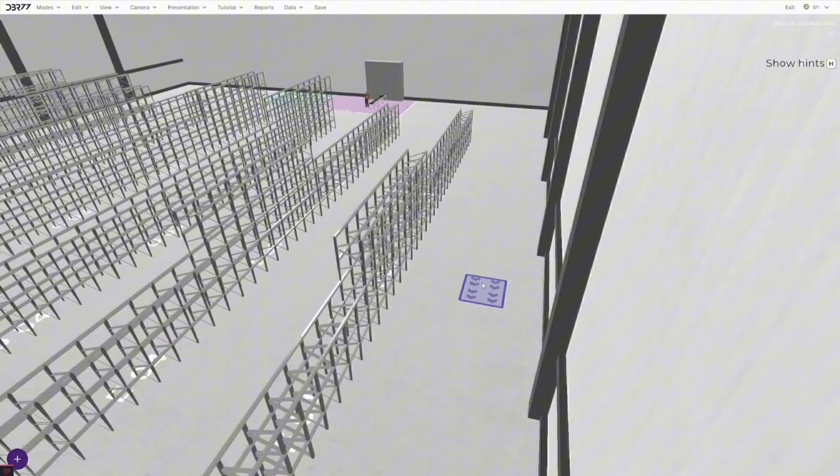With some very brief and short introduction to our meeting, the assumption is that more or less in the hour we would like to share with you very practical insights about digital twin, not only theory of what digital twin can do, but mainly what was done by our team with our clients. We would like to share with you what's the difference between the tools which are on the market and our solution, and why we believe our solution is perfectly fit for the current market expectations.

And we would like to inspire you also with the most famous digital twin which exists on the market, which is of course delivered by NVIDIA. So I do hope we can find such movie, and if not, we will go and probably we'll be back to that movie.

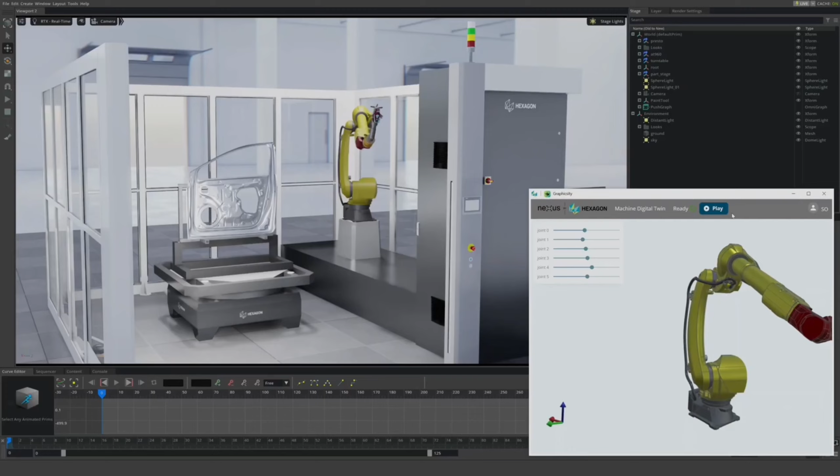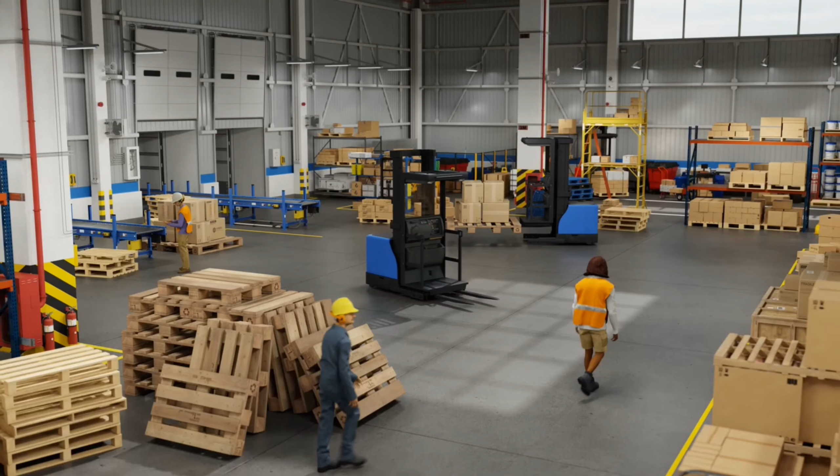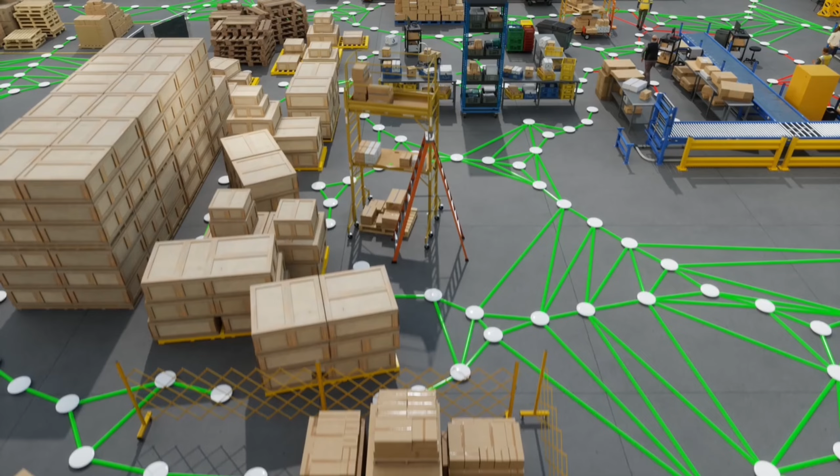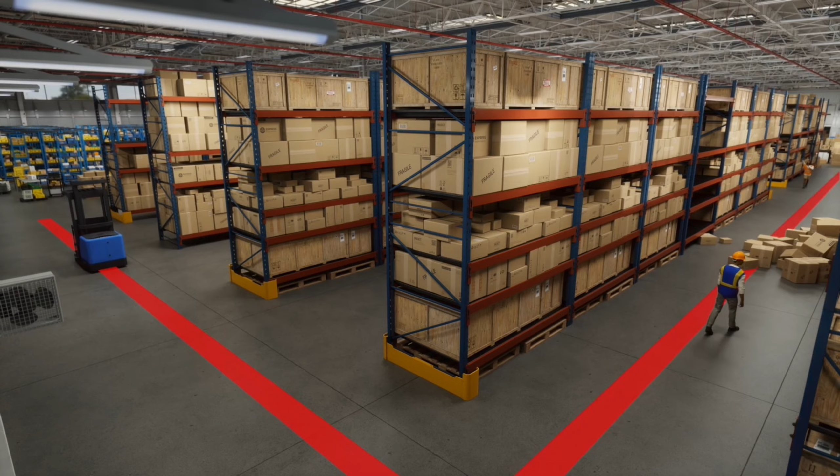Digital twin. The AI agents helping robots, workers, and infrastructure navigate unpredictable events in complex industrial spaces will be built and evaluated first in sophisticated digital twins. This Omniverse digital twin of a 100,000 square foot warehouse operates as a simulation environment that integrates digital workers, AMRs running the NVIDIA Isaac Perceptor stack, centralized activity maps of the entire warehouse from 100 simulated ceiling mount cameras using NVIDIA Metropolis, and AMR route planning with NVIDIA cuOpt. Software in loop testing of AI agents in this physically accurate simulated environment enables us to evaluate and refine how the system adapts to real-world unpredictability. Here, an incident occurs along this AMR's planned route, blocking its path as it moves to pick up a pallet. NVIDIA Metropolis updates and sends a real-time occupancy map to cuOpt, where a new optimal route is calculated. The AMR is enabled to see around corners and improve its mission efficiency. With generative AI-powered Metropolis Vision Foundation models, operators can even ask questions using natural language; the visual model understands nuanced activity and can offer immediate insights to improve operations. All of the sensor data is created in simulation and passed to the real-time AI, running as NVIDIA Inference Microservices, or NIMs. And when the AI is ready to be deployed in the physical twin, the real warehouse, we connect Metropolis and Isaac NIMs to real sensors with the ability for continuous improvement of both the digital twin and the AI models.

Okay, this was NVIDIA's solution. It will be great if we can switch to my screen now and present what DBR77 delivered to the client.

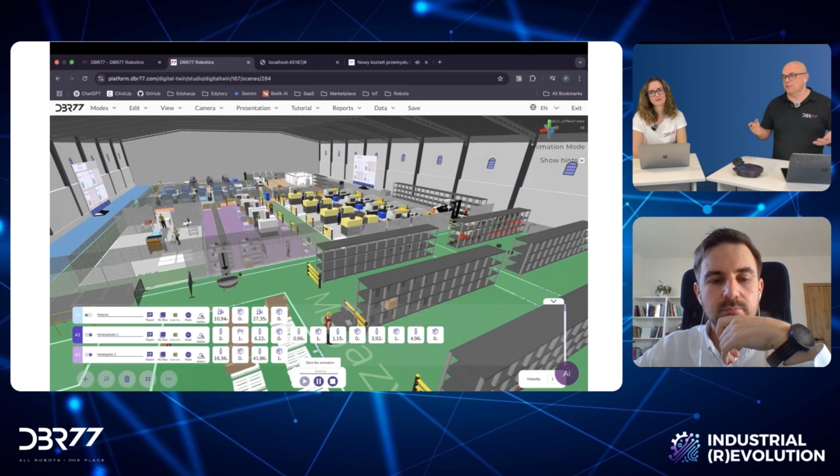So what's the difference between simulation of a production line and the whole factory? This is a great question, because you saw in that short movie that NVIDIA, as well as DBR77, approach the whole factory. In the previous generation of programs, what our competitors did - and still do - is simulate the line. That means we can simulate the process, how material flows, see what the times are for every single station, and whether the line is balanced. But in the previous world, we were not able to look at the whole system, meaning the company, the production plant, the logistics center - the whole system. It means we didn't take into account any kind of analysis about material. So this is a huge shift - in the previous perspective, we only looked at the process, how material flows.

And now we try to look at the real stuff, like, we have some material on gate and how the material flows through the organization. You know what is the biggest difference? In that way we can look at the whole organization as one system, because all of the processes, all of the line, all of the operations and stations are connected through the material flow. So this is a really huge difference.

Can I ask for my screen, for my computer? It will help probably a lot to discuss what we do. Or maybe I need to share something. This is a time for another question, because I have to deal with my stuff.

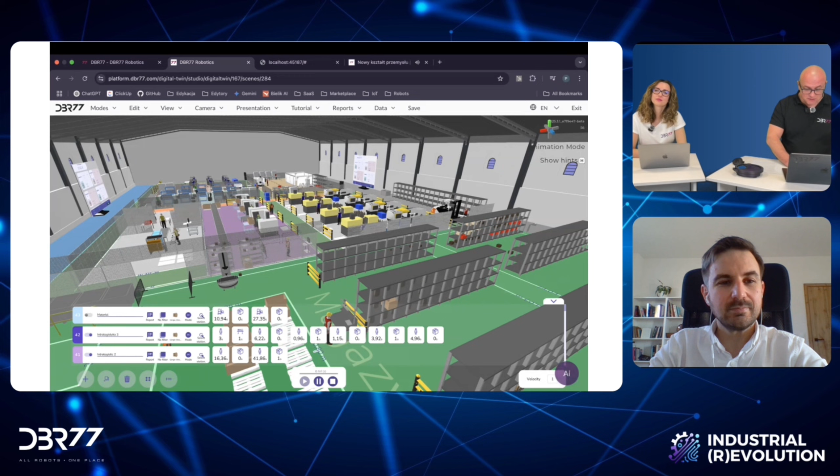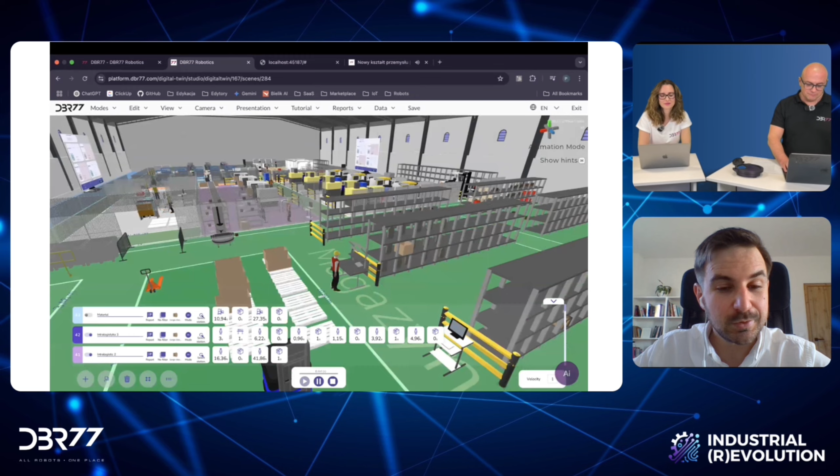Yeah, let me explain. I think we've seen that you were moving on within our digital twin, so it was okay. Now you're switching to the IoT panel, so it seems like it's working. So if you're ready, just take a hit and follow on, so that we can discuss it.

Basically, the animation is simply a representation of a limited task, defined in a specific manner upfront. Simulation gives you the opportunity to tune the parameters or create alternative scenarios for that kind of animation, which gives you additional added value in terms of insights you generate during this simulation.

Yeah, that's truly a huge difference. Because when we speak about animation, like others deliver on the market at that moment, it's a very simple process. For example, one cycle time on the flow, and we can look at like 5 hours, the machine is working the same way, and the results are quite predictable. But in the complex world we exist in right now, the batches of production are very short and there are a lot of interruptions between all elements in the process, so we have to find a way to simulate.

So we can change assumptions first of all. Second, there are a number of diversions in the production, and the final results can be different. So it's so important that we can automatically change assumptions, and then simulation will give different results. And you can guess the different results mean also a lot of data. So that's the huge difference between tools which exist on the market and our solution.

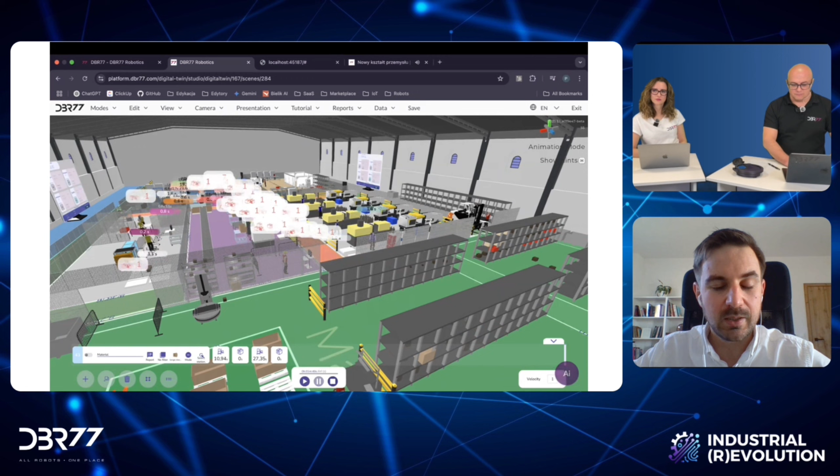Or maybe, simply speaking, just to add up, because I think it might be too difficult for our guests - animation is somehow unrealistic, because in the real world we do not press play and go home while the machine works 24 hours a day. In real life, what happens is we set up a machine for one product, and then after a number of cycles we need to change something, or there's another event triggering additional actions to be taken, and that can be simulated. That is not animation. Then we are closer to real world examples with a simulation.

Yeah, that's the point. Okay, I see now. So give me a few words and some tips on how to build a digital twin.

Yeah, this is the question that Bartek started answering 10 minutes ago. First of all, we need 3D models, so we understand how the process is organized, how the plant is organized, what kind of machines we have there, what kind of equipment, how many people.

So we need 3D models which will represent all of that stuff on our plant. This is the first point, honestly much easier than the second one, because the second one is data. We need to understand first of all what is the typical cycle time for any object in our digital twin - I mean standard time. Many companies know standard time, but very often this itself is the problem. Second, we have to understand what was the deviation from the standard time to the real stuff in the past.

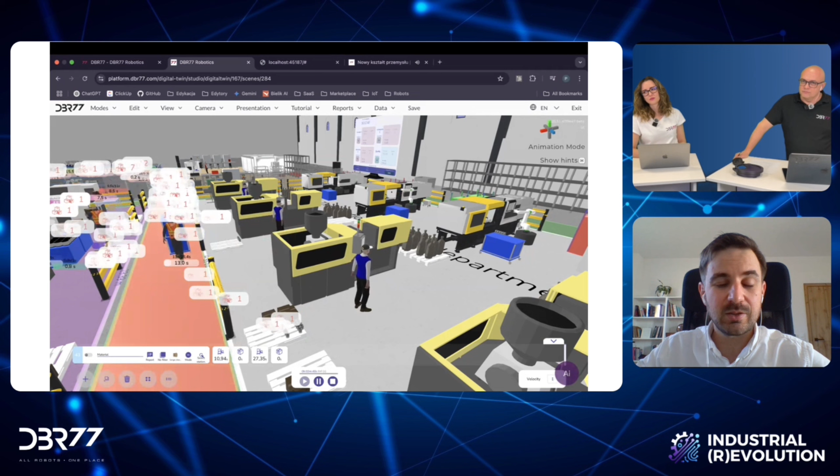No, I would say there are a lot of possible technologies, but they're probably too expensive to have any practical impact these days. We can imagine placing a lot of sensors to track even a single screw, but we need to consider the cost of implementation, and our guiding principle is to keep it simple and affordable, even for SMEs. That's why we need to use software to boost that and improve the lack of speed presented in hardware development, because software develops far faster than hardware these days.

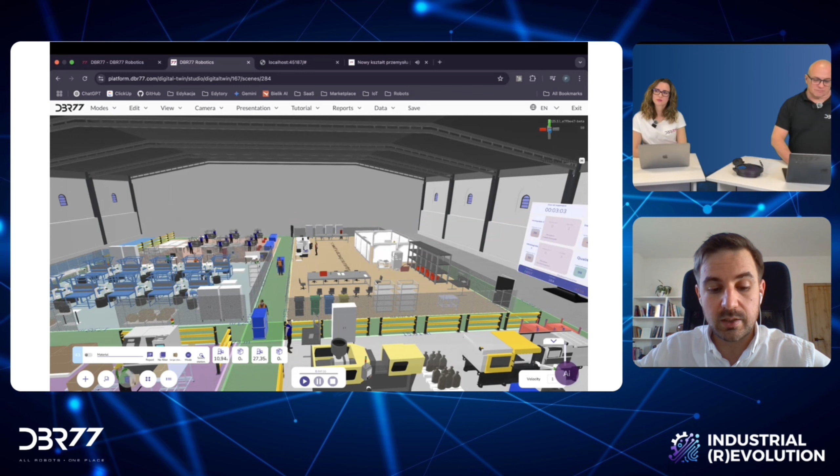Do you have an estimation of which technology will give us the final result about locations? I've got no strong feelings, but for me it should be something between RFID and RTLS. RFID is widely adopted, and RTLS or ultra-wideband solutions provide better accuracy. But the limitation is you need a lot of antennas and additional points to measure distances and create additional network layers covered within the factory, so it gets expensive, and it's probably only used when required, because it's hazardous or required by law.

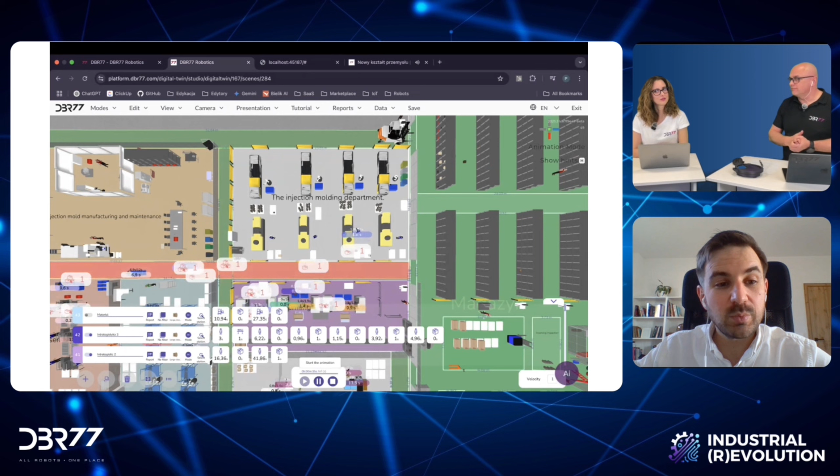I have a bit of a different opinion. I believe sooner or later it will be a camera on the roof, and from that perspective you can look at the plant, as I'll present on my computer. Team, switch to the computer - it will be fun, don't switch it back. Then you can recognize what object is where and what's going on. Analyzing things with LLMs right now is much more efficient than before, and I believe this is the technology of the future. That also answers my previous statement.

Wow, we are back. Okay, so we're in. Let's go with the question. I've disappeared before the question was asked, right? Perfect timing. Everything was messed up, but let's not lose time - let's go back to the discussion.

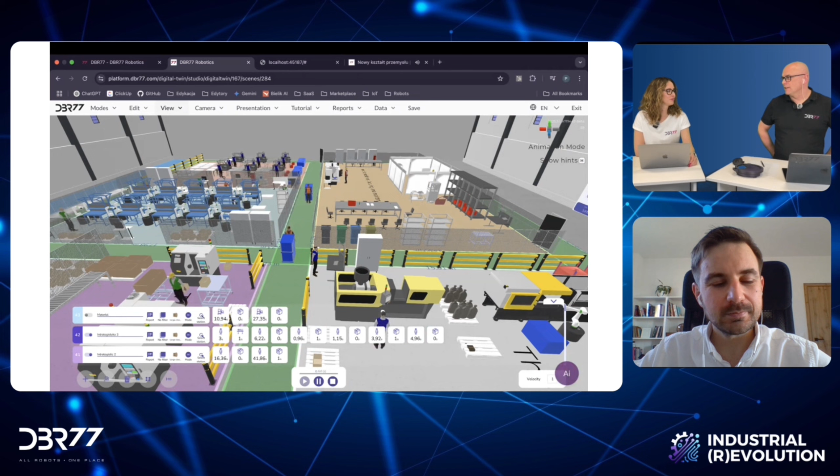Okay, let's go. We started talking about the advantages of the DBR77 digital twin software. Let's start from this point and talk about why this software is better than others. Bartek, would you like to start answering? Because the list is very long. So let's keep it simple - again, simplicity, right?

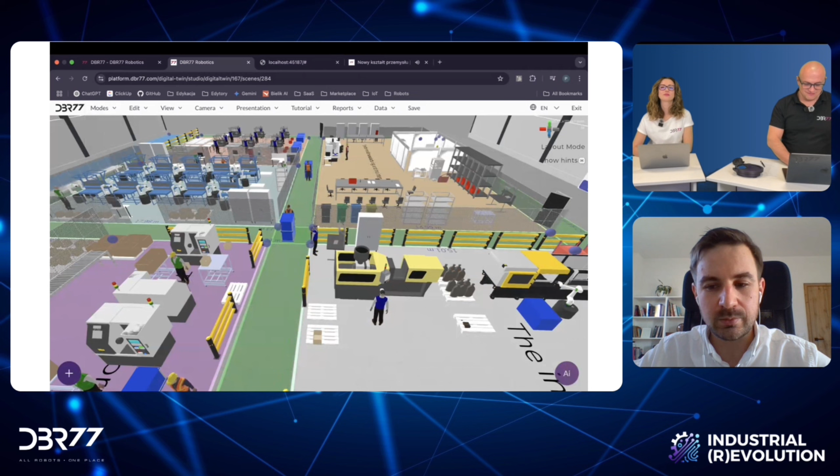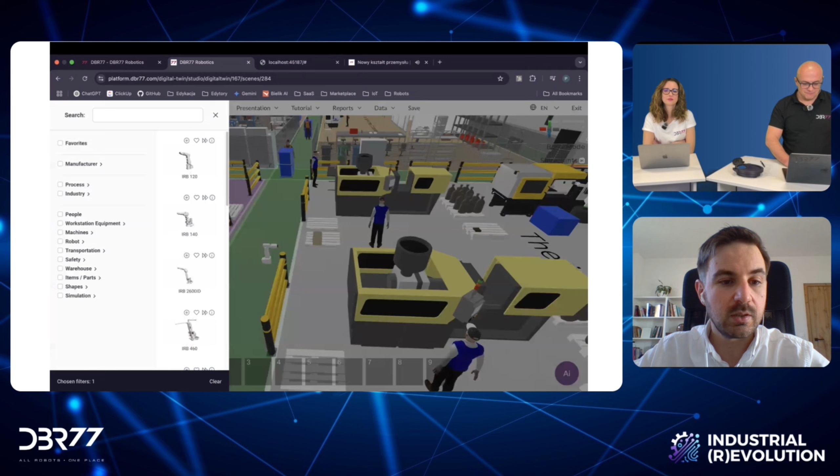You can use it in your browser, so you don't need a very well-prepared or established computer - you can run it on anything. I don't recommend using your phone because you won't see anything. Basically, you can enter with very low barriers - you just need your own computer with a typical internet browser, and that's it. You can start working right there. We've got a lot of tutorials and an AI navigator that will help you make your first steps, learn how to navigate from scratch. Someone can just log in and try it right now, setting up an account and creating your own processes within seconds.

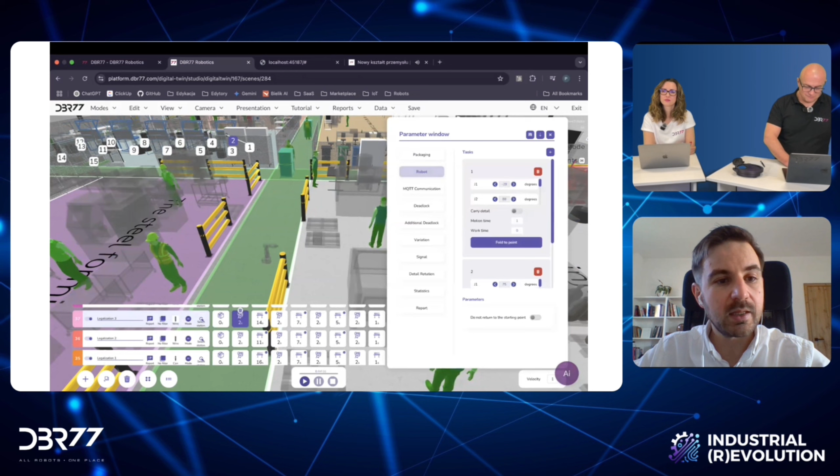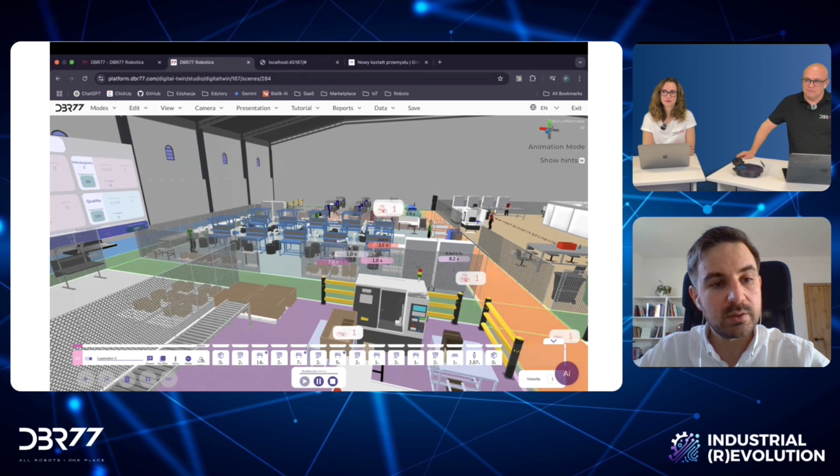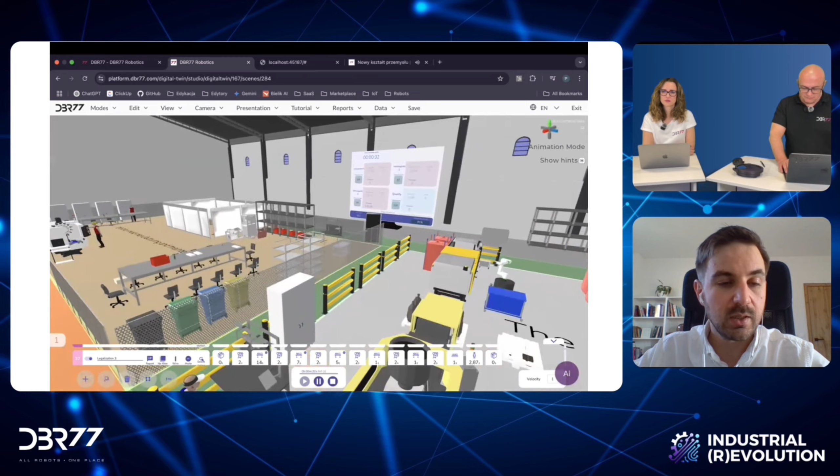Probably the next big thing is, again, simplicity - we try to have all the options prepared in the back end of our solution so the client won't see all the difficult stuff we take care of for them, so it stays very simple. For example, we know 80 or 90% of our clients will use deeply prepared and well-tuned models, so they can benefit, because it doesn't matter what kind of AI model was used for optimization - what matters is the outcome, and that's the biggest benefit of our work.

Okay, maybe I'll add a small point. First, when Bartek was speaking, I wanted to show how easy it is to build anything here. As you can see, we have a layout mode where we can change everything in the layout, put in walls, describe what is where. Then we have a short, long list of assets.

Assets for us means that we have 3D models. It's very easy to take it, just place whatever is needed. That's all. If everything has to be connected, has to be somehow in communication between each other, it's done in that place. And then finally, we have animation mode, where we have a long list of animations that can be used to describe what people, machines, robots, or trolleys have to do on the factory, and then simply go and we have visualization, we have simulation, everything works pretty well.

I would like to add another small thing. Everything which you will produce in your computer, in your PC, you can also see in virtual labs. So simply when you push the save button here, you can go to your VR and be there in the regular shapes. Everything is that size like in the real world, and we can simply visit everything. And on top of that, price, of course.

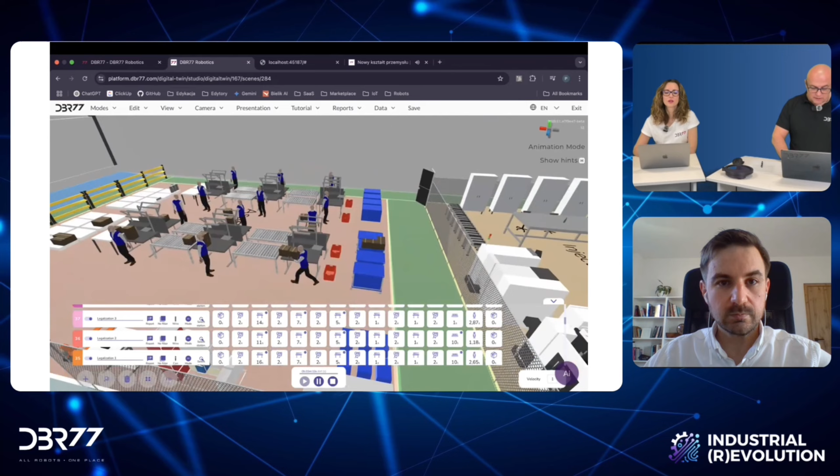And then we have the complete process. Here we have some molding area, we have CNCs which do another job, we have some maintenance area, and you perfectly know that in any kind of factory we need space for guys who can repair absolutely everything. Here we have some welding space where we do welding stuff. We have assembly - as far as I remember, 12 guys who do simple assembly, something like legalization, quality control.

This is a very good question, because the material flow is normally recognized once the process flow is established. In my case, look how easy it is to recognize - we have incoming gates here, incoming inspection, then we have all the storages here, so we can calculate what space is needed, and here we have the flow of material, which is organized.

What is very important here in our solution, as you can see, we have regular spaces for intralogistics, and all intralogistic processes are also presented. This is not only the case that we look at the stations and do typical lean analysis, like calculating what is the OEE in place - we are also able to check how the flow of material should be organized.

This is a milk run, so we know the trolleys which are running in the same cycle all the time, or this is a Kanban, when we can ask what kind of material should be delivered where and when. All of those processes can be presented here also.

What is interesting when you look at my case, you should also recognize that there are no walls, nothing like that - it's an absolutely ideal world. So in real life, when we do such a design of a new factory, it almost never works. So we should start with layout analysis, with all kinds of concretes or other elements which can be difficult for us and can cause an interruption in our production flow.

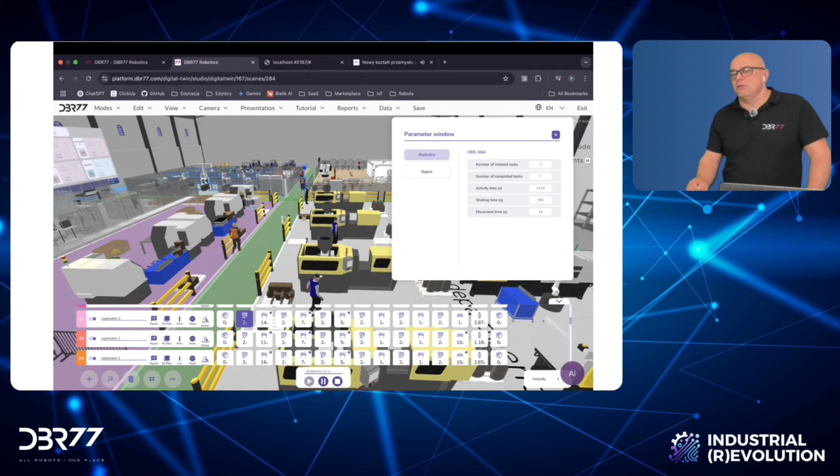So that way we are able to recognize where the losses are. When you look at lean methodology, we always try to find one of the 7 losses. The most important is the time lost by machine or by the guy, and our statistics here can present it very, very well.

So from the moment we started our presentation, we did this kind of simulation, and look, we have a number of reports. On this simulation, every single process can we put it on the screen?

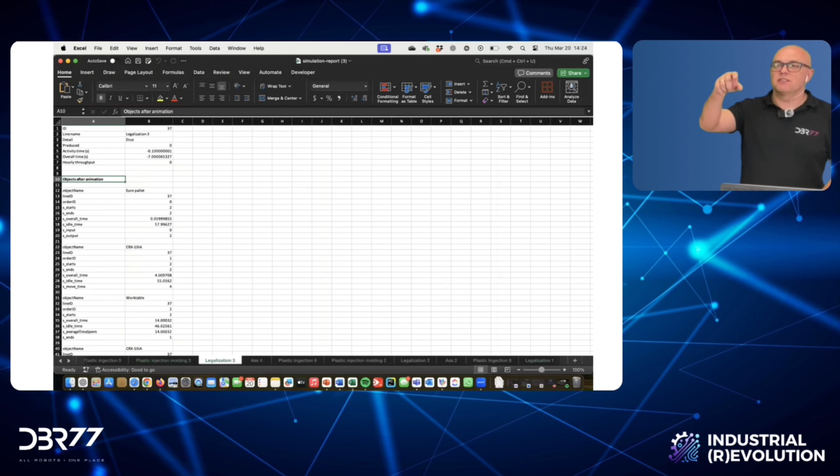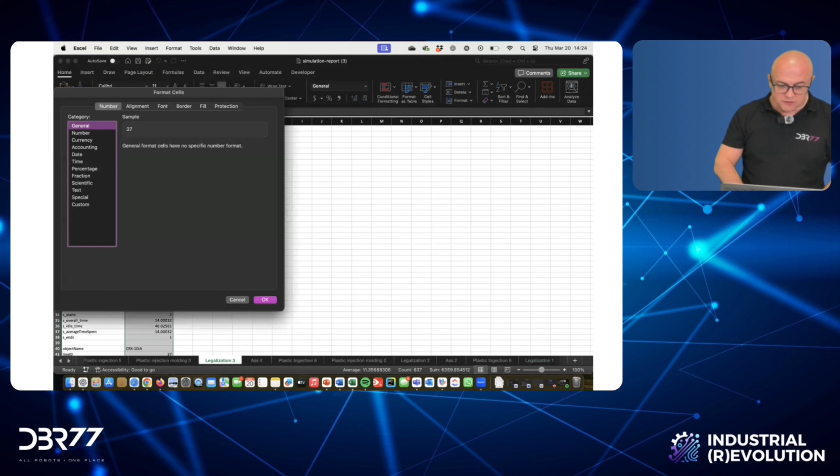Every single process is calculated and every single object has its own analysis. For example, in that process which we have Legalization 3 on that line, we can see how many pieces were produced, what was the time, what was the regular cycle time, and we can go through every single step in the same analysis.

Yeah, so for a regular operator, those numbers don't speak so well. But when you're a lean specialist or process engineer, in that simple way, you can see every kind of information we're looking for.

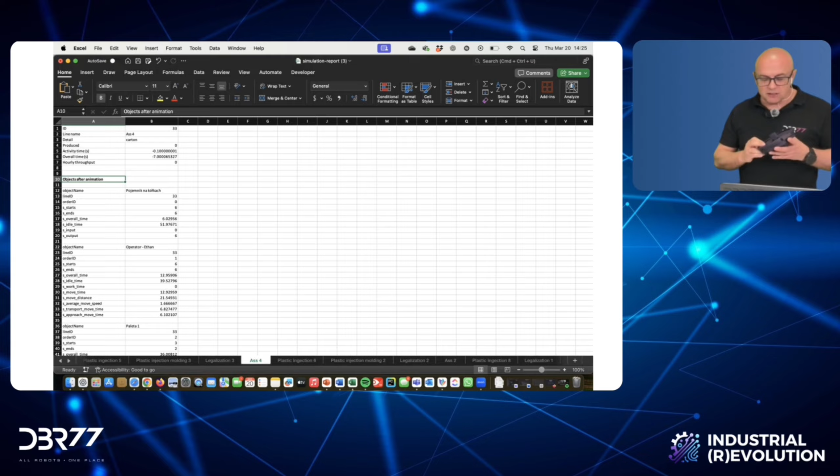But this is just the first step, because the real stuff begins when we're able to collect data from the lines. When we can put sensors, use the stuff I presented yesterday, when we can collect data about real efficiency, very easily we can first of all know what the real cycle time is.

We can compare the cycle time with the standard time, and we also know how the machine was working, how many minutes, and when the machine was stopped and why it was stopped. All of this data we can once again bring to the digital twin.

And that is real data which will feed our digital twin. So as you can see, we can simulate and animate based on our assumptions about the real world, or we can really use real data, which is actually much, much more accurate.

I see now. But you also refer a lot to Lean 4.0. So can the specialists who work on DT also use this methodology themselves?

Yeah, actually that methodology started with technology like digital twin. What's the case? Lean is like 70 years old. After the Second War, the Japanese, like Toyota, had to find a way to use what they had in the optimal way, and Lean history started.

Lean became very famous in the late 19th century, no, last century, after the Toyota book was published. We recognized that we can measure processes, and based on the data, find a way to improve them and increase efficiency.

But the issue - or in the past it wasn't a problem, now it is - is that 20 or 30 years ago, production batches were very, very long. Like when I was CEO of Maflo, we'd start production of one part number Monday morning and finish Friday. So for long periods you didn't have to change anything. In current life, almost nobody has production runs like a week anymore.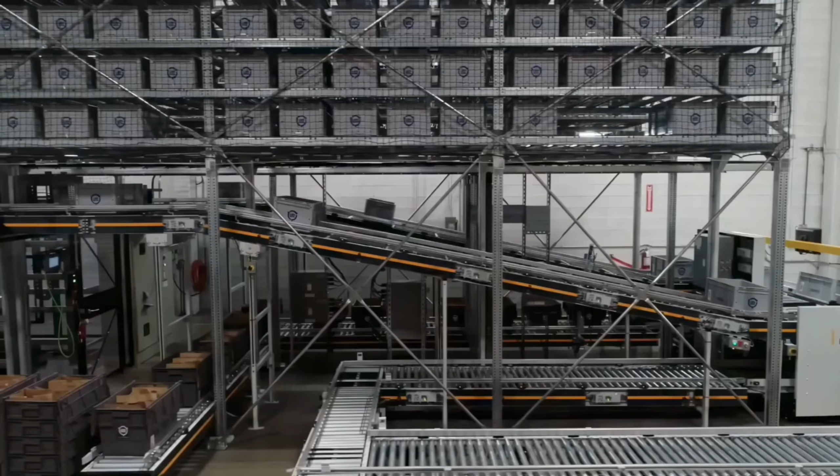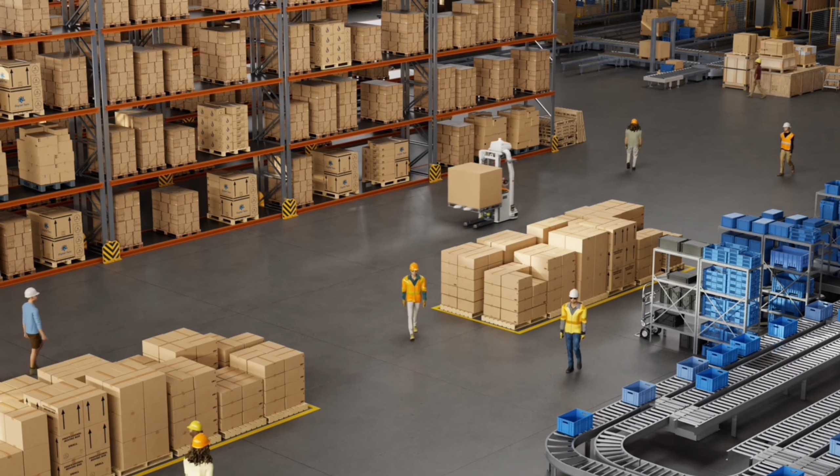Kion, the supply chain solution company, Accenture, a global leader in professional services, and NVIDIA are bringing physical AI to the $1 trillion warehouse and distribution center market. Managing high-performance warehouse logistics involves navigating a complex web of decisions influenced by constantly shifting variables, including daily and seasonal demand changes, space constraints, workforce availability, and the integration of diverse robotic and automated systems. Predicting operational KPIs of a physical warehouse is nearly impossible today.

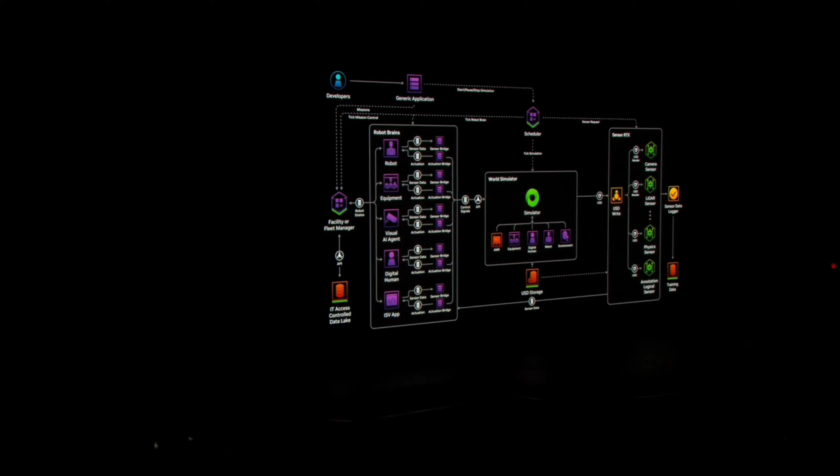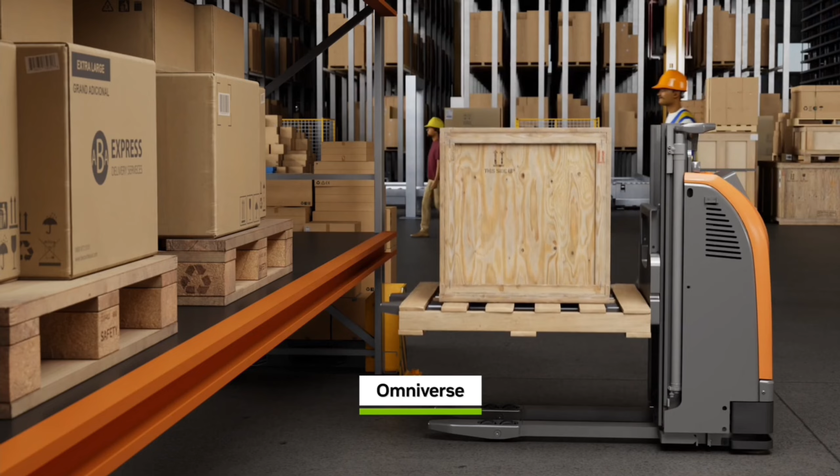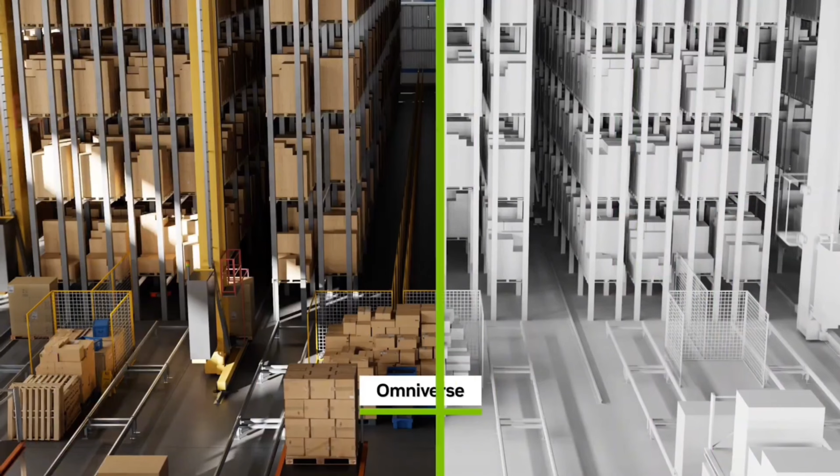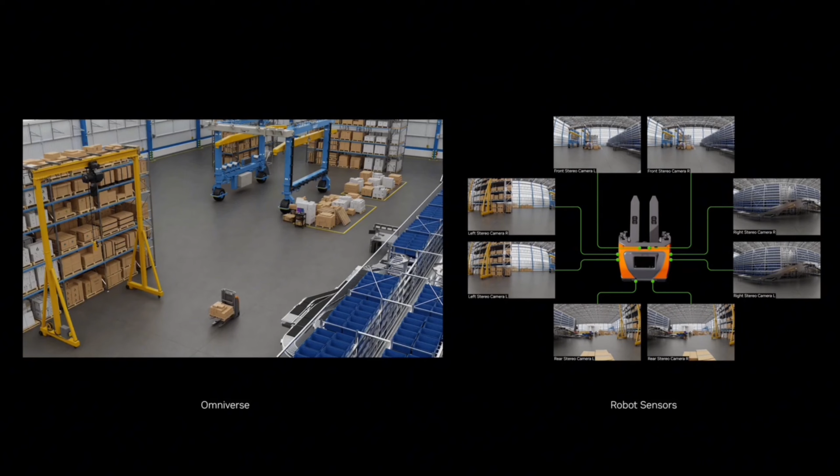To tackle these challenges, Kion is adopting Mega, an NVIDIA Omniverse blueprint for building industrial digital twins to test and optimize robotic fleets. First, Kion's warehouse management solution assigns tasks to the industrial AI brains in the digital twin, such as moving a load from a buffer location to a shuttle storage solution. The robot's brains are in a simulation of a physical warehouse, digitalized into Omniverse using OpenUSD connectors to aggregate CAD, video and image to 3D, LiDAR to point cloud, and AI-generated data. The fleet of robots execute tasks by perceiving and reasoning about their Omniverse digital twin environment, planning their next motion and acting. The robot brains can see the resulting state through sensor simulations and decide their next action.

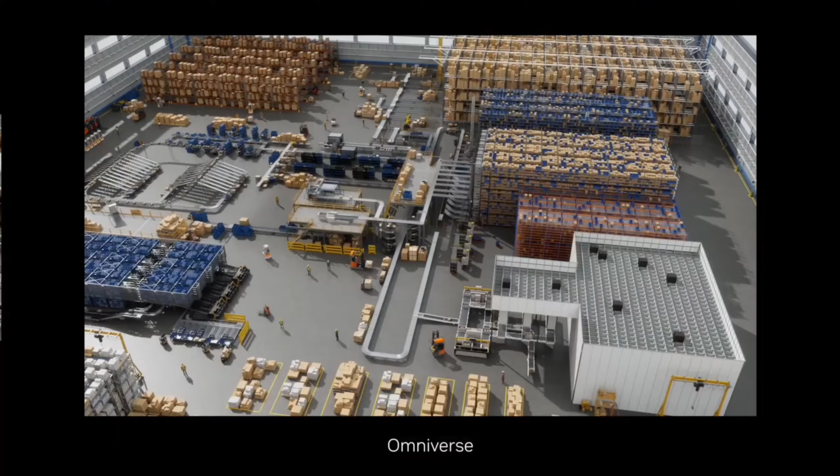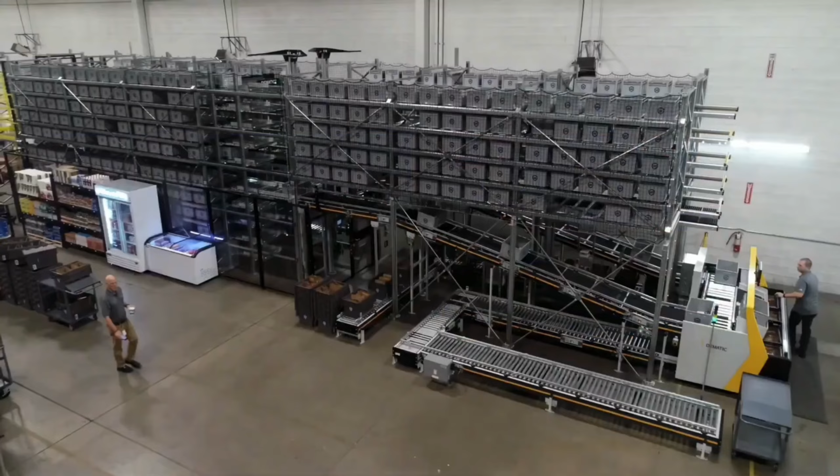The loop continues while Mega precisely tracks the state of everything in the digital twin. Now, Kion can simulate infinite scenarios at scale while measuring operational KPIs, such as throughput, efficiency, and utilization, all before deploying changes to the physical warehouse. Together with NVIDIA, Kion and Accenture are reinventing industrial autonomy.

In the future, that's incredible - everything is in simulation. In the future, every factory will have a digital twin, and that digital twin operates exactly like the real factory. In fact, you could use Omniverse with Cosmos to generate a whole bunch of future scenarios, and an AI decides which one of the scenarios is the most optimal for whatever KPIs, and that becomes the programming constraints - the program, if you will - for the AIs that will be deployed into the real factories.

The next example, autonomous vehicles.

That's the message which I wanted to use at the end of our meeting. Absolutely every factory, sooner or later, will have a digital twin with small changes - maybe not with NVIDIA's solution, but with our solution, because our digital twin does exactly the same thing. We're able to simulate all possible scenarios, we're able to collect the data, we are able to produce synthetic data, and based on that, we are able to train our MLs, which help managers with every kind of decision. So I truly believe that what NVIDIA does, and what we try to do in the same direction, is the future of manufacturing.

Any conclusions, guys?